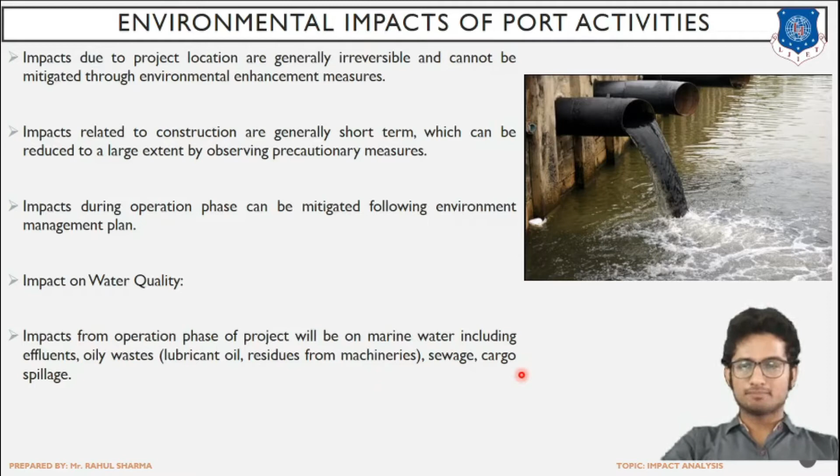Now, basically if we talk about the water impact of port activities, it deals with effluents. Effluents means waste which is released into the water body. So these are various examples - oily waste, or sewage, which might be domestic sewage or industrial sewage, or spillage of cargo. Spillage means oil released through the movement of the ship, which might be intentionally or unintentionally spread in the water body in large quantity. This is the main aspect.

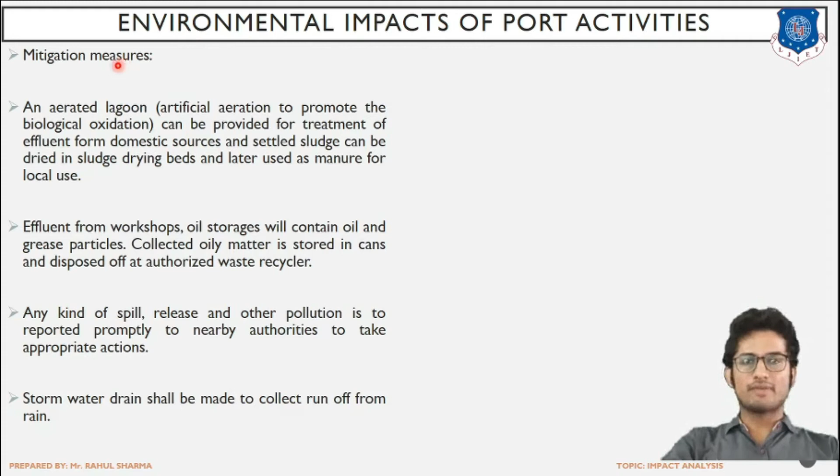Next, talking about the mitigation measures - which measures or activities can we do to reduce the effect of this effluent, this waste on the water body generated from port activities. An aerated lagoon - this is an aerated lagoon. Aerated means artificial aeration has been done. Aerated means the movement of air is done to promote biological oxidation.

Lagoon is a shallow water body where the water is generally stationary and in less amount. This is an aerated lagoon, where artificial aeration is intentionally carried out, providing air to promote biological oxidation. This relates to environmental engineering, but in general we are providing oxygen to carry out activities that lead to treatment of specific waste, so it can be provided for the treatment of the effluent.

We want to treat the effluent that has reached the water body from the domestic source, and the settled sludge can be dried. Whenever we carry out the oxidation process, sludge will be generated, a slurry containing soil components, water, organic waste, and certain inorganic waste. That settled sludge is the slurry that has stayed at the bottom, settling due to the increase in density and getting deposited there.

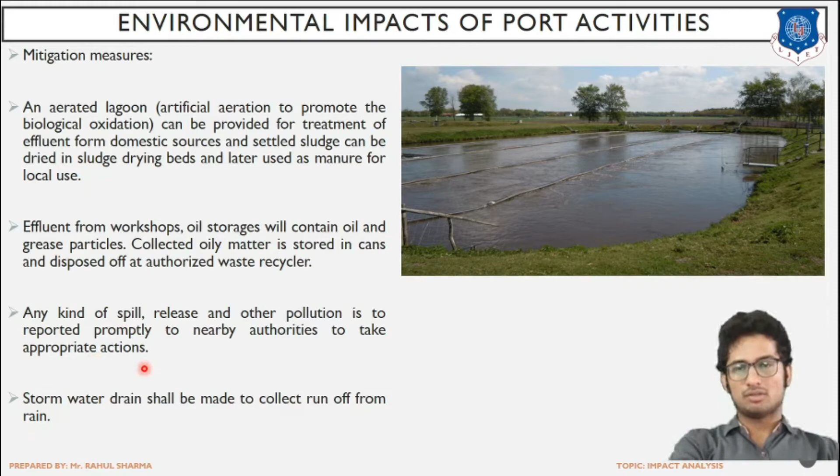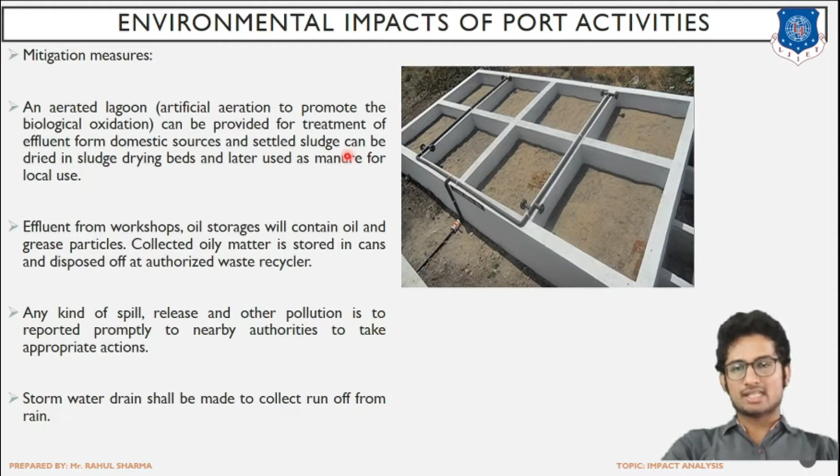If any spillage is taking place, that is, if any unwanted incident has occurred and due to that any large amount of oil spillage has taken place, then that has to be reported to the authority so that prompt action can be taken.

Storm water drains shall be made to collect runoff from the rain. Runoff means that water which has not infiltrated into the soil. What might happen is that the runoff might mix with unwanted particles, and that might again flow as effluent into the water body. So drains should be provided so that we can remove the runoff from the port itself, and make sure that effluent does not get mixed with the water body.

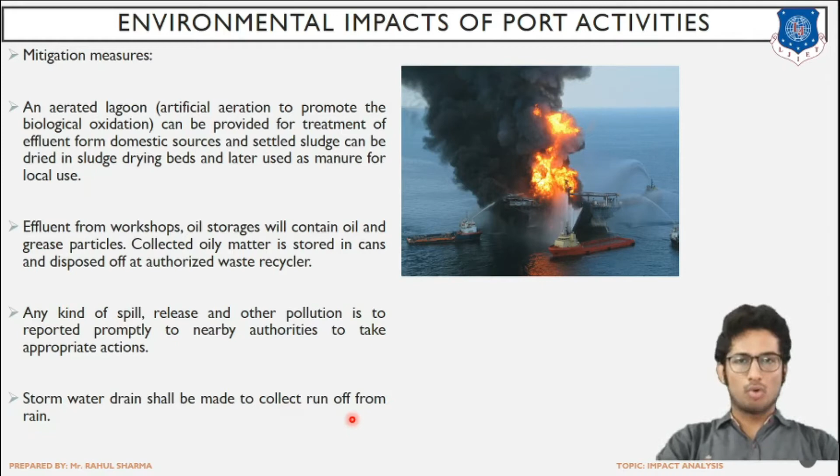Next, talking about the impact on air quality. We have seen firstly about the impact on water, now let us talk about the impact on air. Major sources of air pollution during the operational phase include vehicle traffic to service cargo at port, that is the movement of the ship and vessels, due to which smoke will be generated. Emission from the port equipment, the equipment kept at the port, will also generate smoke into the air.

Cargo handling and the fuel burning - due to the burning of fuel and the handling of cargo, air pollution will take place. Mitigation measures are the measures we should take to reduce the effect on air.

A system consisting of pumps or a storage tank for dust suppression - suppress means to make it settle. So a tank for dust suppression at the discharge feeding points of belt conveyors will be provided at each transfer tower for dust control.

Feeding points means the points which are releasing the particles into the air. So at these discharge feeding points, the releasing points, we can provide a storage tank or a pump facility which will make the dust particles which are getting released settle down.

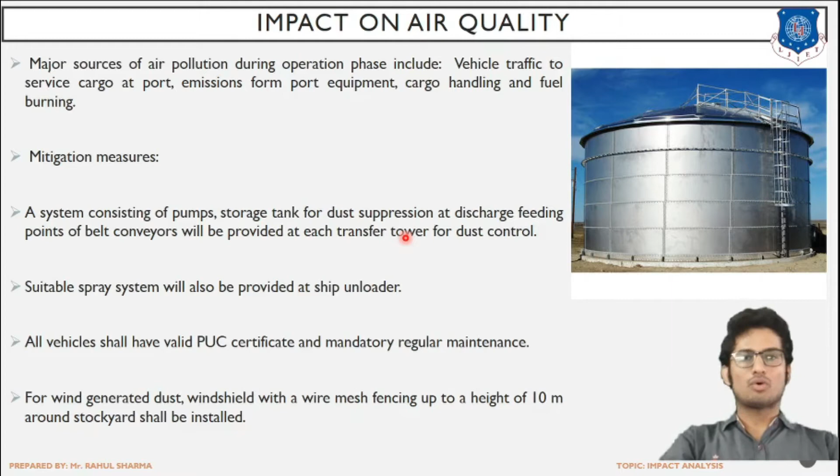A suitable spray system can also be provided at the ship unloader. Due to the spray system, the air particles which are in suspension will also get settled, so we are not allowing those particles to go into the air. Through the spray system, we can make the particles settle, so that can also be used.

All vehicles shall have a valid PUC certificate, that is the pollution under control certificate, and it has to be made compulsory for regular maintenance. So that will also keep the air quality in check.

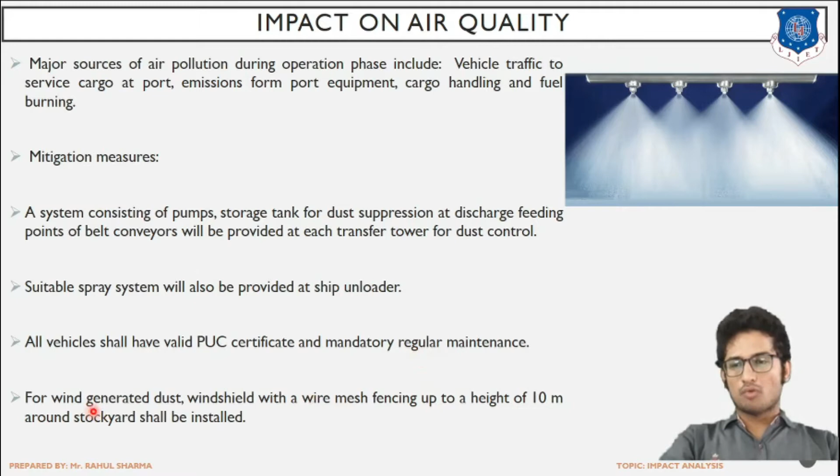So a fence of 10-meter height, that is a windshield, can be prepared on the periphery or circumference, and what will happen is that it will not allow the movement of the dust which is being generated into the widespread area. It will keep the dust generated into check in that specific area only.

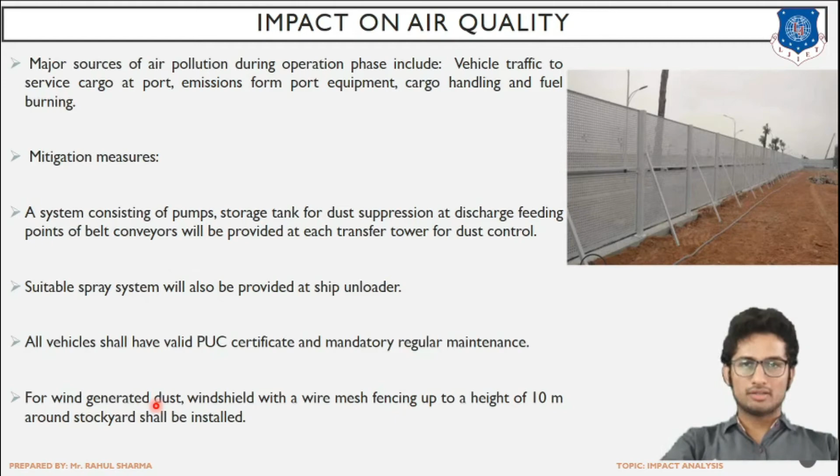Next is the impact on noise quality. Noise due to equipment, vehicles, and human activities are the chief sources. So basically three aspects - the equipment, vehicle or ship or vessel, and human activity at the port - these are the main sources.

Increased level of noise depends upon the volume of traffic visiting the port, the road condition - that is the land condition in the port area - vehicle condition, condition of the ship or vessel itself, speed of the ship, and the congestion of traffic, that is how much amount of ship or vessel exists at that specific point of time.

Mitigation measures are again the measures we can take to reduce the effect of port activities on the quality of sound.

Noise level of the port equipment shall conform to the relevant standards prescribed in the environment protection rules. So the noise generated should not exceed the values given in the environment protection rules - it should conform, match, or be below those specific maximum standard values.

Workers shall not be exposed to noise levels more than permitted for industrial premises. In the environment protection rules, the specific noise limit in decibels is given, so workers should not be exposed to noise exceeding that maximum standard value.

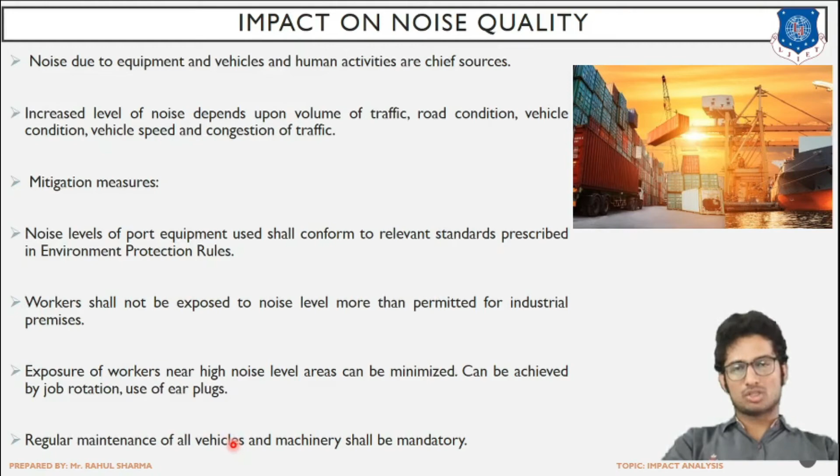Regular maintenance of all vehicles and machinery shall be compulsory, to make sure that they don't create a higher amount of noise. The vehicles, ships, equipment, and machinery should be maintained regularly.

Next is the impact on ecology. This deals with the effect of port activities on creatures living in the water body. Major impacts are anticipated from vessel movement, cargo handling at the port, and wastewater discharge from the port—that is, wastewater generated from port activities discharged into the water body—and also due to maintenance dredging, which we have already studied. These are the main sources affecting ecology.

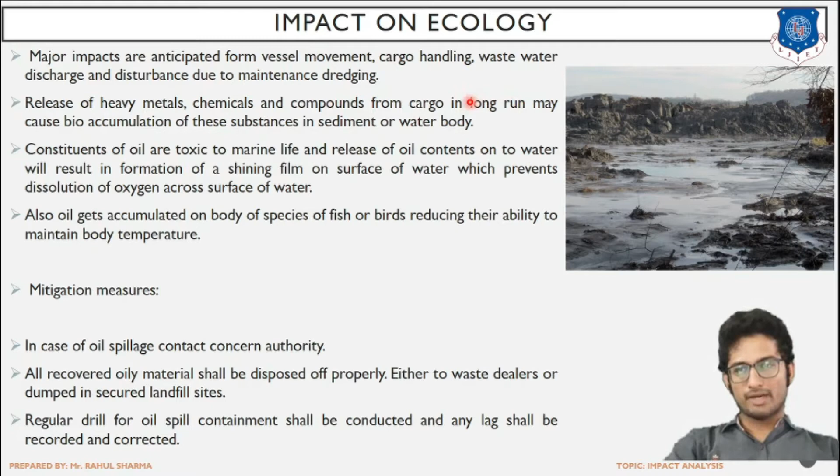Release of heavy metals, chemicals and compounds from cargo in the long run may cause bioaccumulation of these substances in sediment or water body. The metals, chemicals and compounds released due to the continuous movement of ships in the water body may, after a long period of time, cause bioaccumulation.

What is bioaccumulation? These toxic chemicals or toxic metals are first consumed by very small creatures, and after consuming them, those metals or chemicals enter the body of the small creatures. Then the moderate or medium-sized creatures living in the water body eat the small creatures, so the toxic components are transferred to the medium-sized creatures. Then the large-sized creatures feed on the average-sized creatures, and the biomass gets accumulated into the larger creatures.

As fisheries are also used as a source of food, the toxic chemicals or compounds released in the water body—first eaten by small creatures, then by average-sized creatures, followed by large-sized creatures—those compounds and heavy metals ultimately end up in the human body. So bioaccumulation means these various toxic materials are ultimately getting accumulated, finishing off into the human body. This is a great concern.

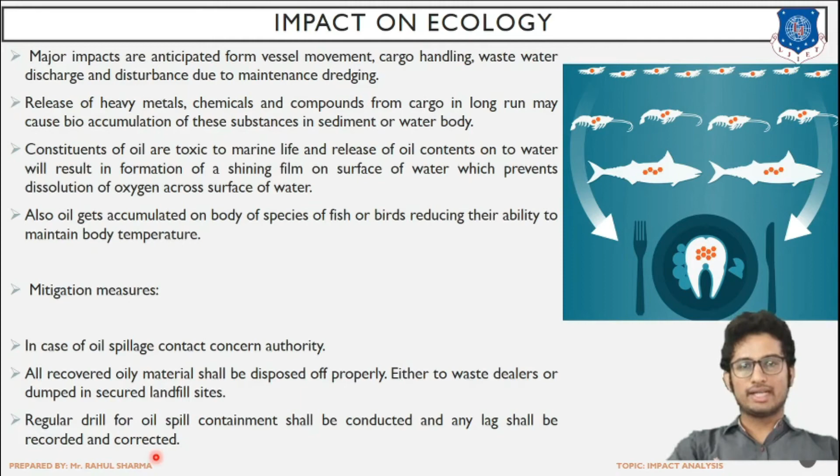Next is the impact on land and soil. The proposed port is planned on reclaimed land between the low and high water line. Reclaim means to gain again. So if the land level has been reduced, in reclamation of land we increase the level of land. Generally, if the level of the port is reduced due to scouring action or erosion, then through the reclamation of land, by the filling operation of land or soil, we increase the level of the land. So the port is generally planned between the low and high water line, in the average range.

The port site does not have much vegetation except some afforestation carried out by the forest department. So generally, if we talk about the surrounding area of the port site, there is not much availability of vegetative cover. Only a very rare vegetative cover will be there due to some afforestation. Afforestation means the activity of planting trees. So if that activity has been done, a bit of vegetative cover will be there.

Present vegetation is planned to act as wind breakers. So now we are planting vegetation to act as wind breakers. If the vegetative cover is there, or if trees are present through afforestation activity, then wind breakers means we are creating an obstruction for the movement of wind. If vegetative cover is there, trees planted, they will act as a barrier to the movement of wind. So if there is high wind near the port and vegetative cover is there, it will protect that specific site area from the effect of high intensity wind. If no such cover is there, then all that high intensity wind will enter into the specific port site, and that might create a problem. So as we can see, the wind direction is being diverted due to afforestation.

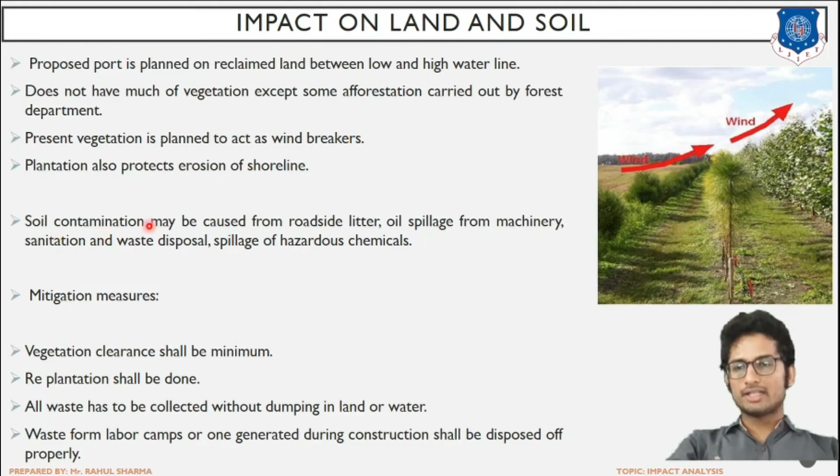Soil contamination may be caused from roadside litter - that is, if we are throwing waste material anyhow, that will contaminate the soil. Oil spillage from the machinery - if equipment is continuously spilling oil into the soil, those toxic materials will enter into the soil. Sanitation and waste disposal - if proper measures are not adopted and waste is directly disposed of into the soil, those toxic materials will enter into the soil. And spillage of hazardous chemicals - if any heavy metal or hazardous chemical is spilled into the soil, that will also reduce the characteristics of the soil.

Mitigation measures: first and foremost, vegetative clearance shall be minimum - that is, the deforestation operation, the removal of vegetative cover, should be as less as possible. Replantation shall be done.

If a situation arises that we have to cut the trees or remove the vegetation in a certain stretch, then replantation shall be done in another area nearby. So the trees which have been removed, or the vegetative cover which has been removed, should be taken care of and planted at some specific location or area.

All waste has to be collected without dumping in land or water. Instead of directly dumping the waste into the soil, it should be collected and disposed of at the specific dumping site only. Waste from labor camps or generated during construction shall be disposed of properly. Instead of a haphazard manner, the waste generated at the specific site should be collected and dumped at the specific dumping site only, and not on the land or in the soil.

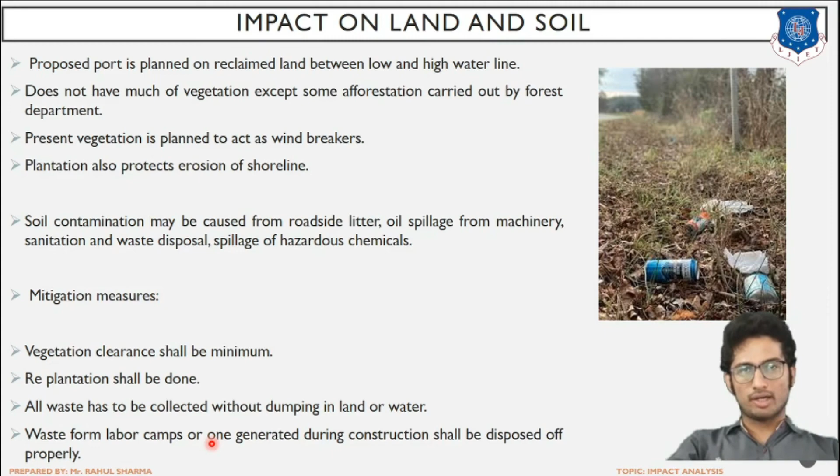Next and last is the impact on visual quality, that is the impact on aesthetics. Lighting from night operations may cause nuisance to the nearby community. So if there is stray light or continuous lighting in a haphazard manner during night operation without any need, that might be a nuisance to the surrounding area of the port.

Stacking of waste from port activities means piling up. So piling up the waste generated from port activity, instead of disposing it, will be a hindrance to a pleasant view. Also, the smoke from the ship gives an unpleasant impression. It is also a thing which hinders the aesthetics of the specific port site.

Mitigation measures include appropriate location of the port, which can reduce the effect. So selecting the port site in such a way is important, because that cannot be altered once the site is selected. So at the time of choosing the location or area, if we keep the aesthetics in mind, that can be a good measure for improving its appearance.

It may be possible to design the storage area so it is not visible from the road or nearby locality. Designing it this way means that movement taking place on nearby roads or the surrounding locality cannot see that storage area, which removes the aesthetic concern. Why? Because a certain thing which cannot be seen cannot be talked of. So if we are designing the storage area such that it cannot be seen from the roadside or surrounding area, then we need not worry about the aesthetics because it will not be visible.

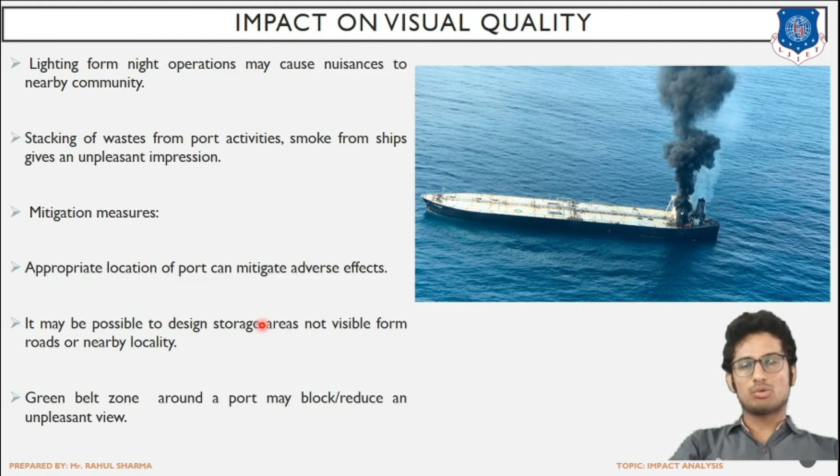A green belt zone around a port may block or reduce an unpleasant view. A green belt zone is generally a border or plantation of vegetative cover in a belt or stretch in the surrounding area. Cultivating this vegetative cover in a specific stretch surrounding the port will also be a pleasant view and will improve the aesthetics of the port, while mitigating the unpleasant view surrounding the port.

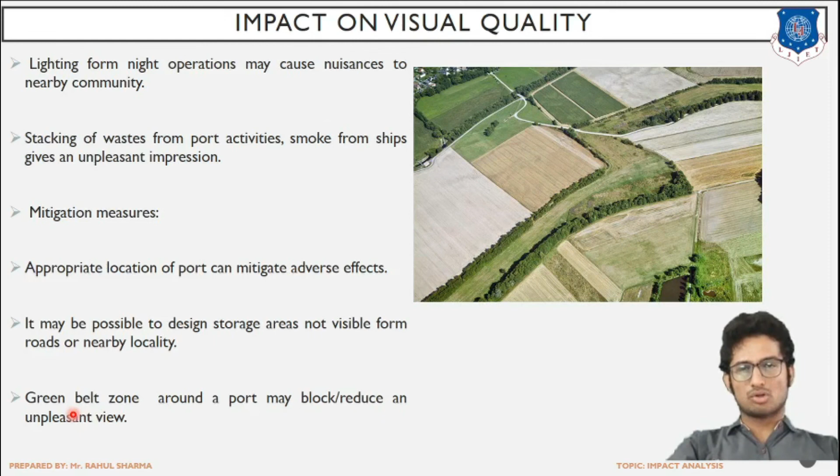So that's it for this session. In this session, we have discussed in detail the environmental impact of port activities. First, we saw the impact on water, then air, third was noise, fourth was land and soil, fifth was ecology, and sixth was aesthetics or visual quality. So we have seen in detail all these six aspects related to the environmental impact assessment of port activities. That was the second part of the impact analysis chapter.

So both parts are over. In the last session, we discussed in detail the cost aspect, and in this session, we have discussed in detail the environmental aspect. So that is it for this chapter of impact analysis.